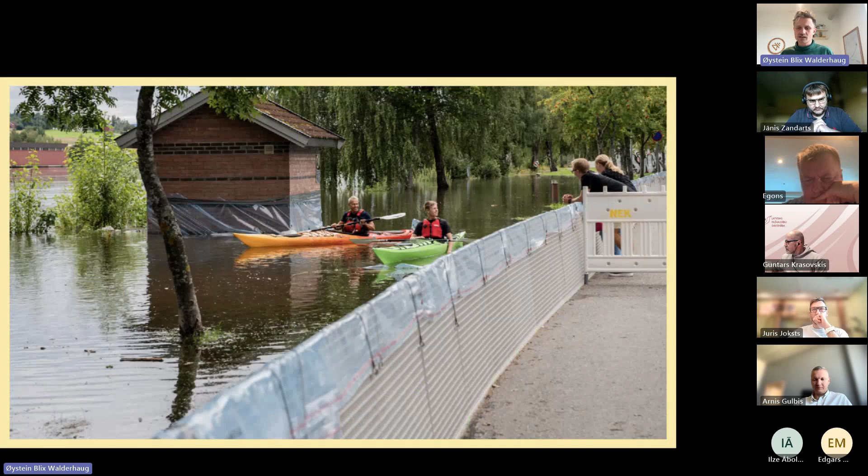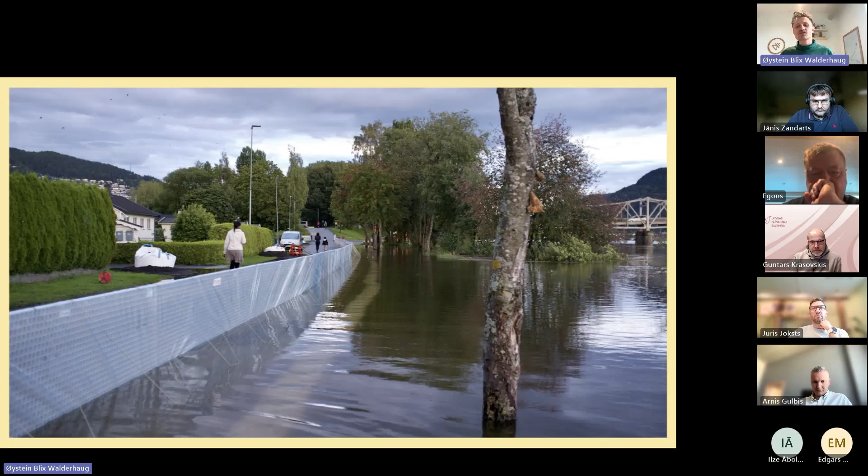Perfect. So to begin the presentation, we are very, very happy. We're very proud to be able to start all our presentations with pictures from real floods these last couple of years. There's been a lot of flooding recently, and we're very happy to say that our flood barriers have been used in many European countries. We started in Norway, and we've delivered to Norway, Denmark, Germany, France, and Spain, where currently Germany is our biggest market. But we're expanding to many other places since there is a lot of flooding all over Europe. I mean, all over the world, essentially.

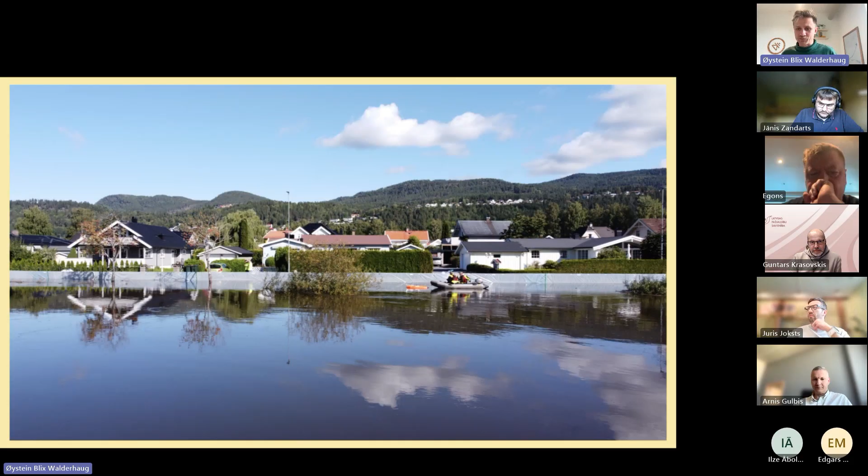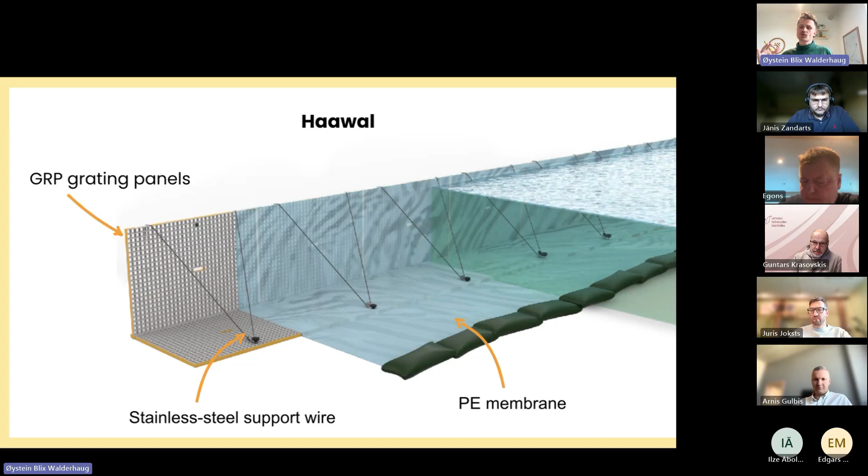So this is what our barriers do. It's a temporary barrier that stops water. But to say a little bit about how it does it, it is a temporary barrier that is not attached to the ground in any way. It is just put on the ground and it uses the weight of the water to stabilize the barrier. It's made of these glass fiber panels that are put together in an L shape, covered in a waterproof polyethylene membrane, supported by a wire to hold everything in place, and also one row of sandbags to make sure that the water goes on top of the barrier to push down and to stabilize the system.

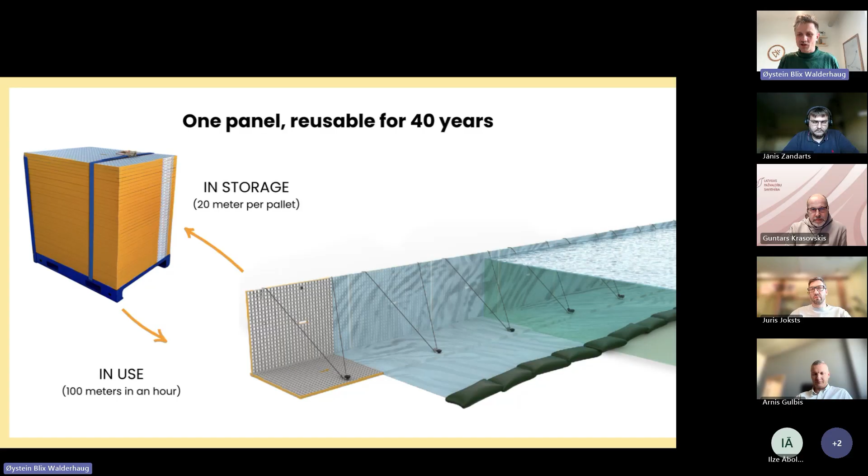And it's comprised of these panels, and all the panels are the same. For all the pictures, all the videos, everything we have, it's the same panel. One panel on the ground, one panel on the wall. There's no difference between those panels. So basically what we deliver is pallets with these plates on them, where you can then set up the barrier very quickly. From real life experience, it's 100 meters of flood barrier in about 1 hour. So quite fast to install. And in storage, it's 20 meters per pallet. So we have a video which shows how it's set up quickly. Hopefully the quality will be good enough.

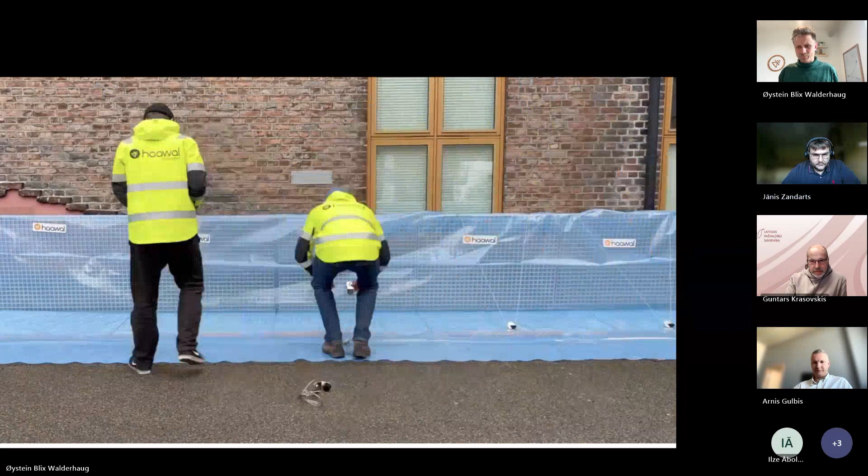How was the quality of the video? Pretty good, but without sound. Okay, yeah. I guess I can also just very quickly, if I stop sharing here, we can try something. Can you all see me?

Perfect. Yeah. So we have, let's see. So this is just a small module, just to kind of show you how it works. So the panels are stacked like this, and then they're connected by just putting this into the hole like that. And then it's supported. So it's quite a simple mechanism, but very, very strong and robust.

See if we can jump back into the presentation. There we go. Are we back in the presentation?

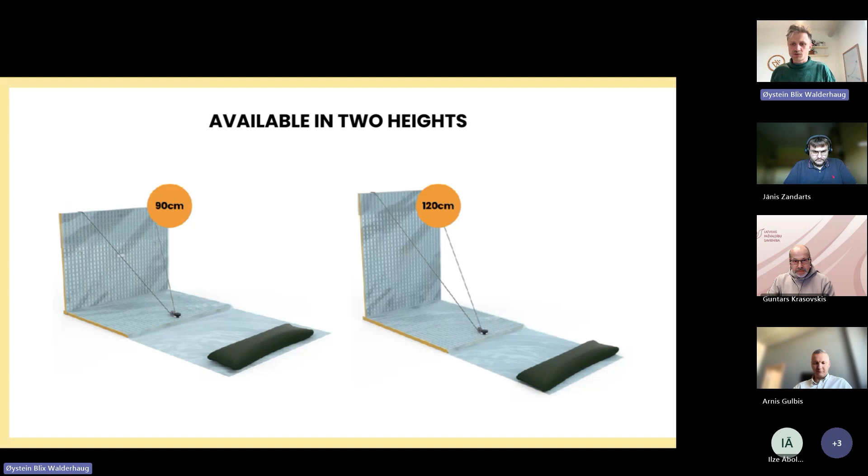So we have two heights, 90 centimeters and 120 centimeter tall barrier. And the prices are 348 euros per meter for everything for the 90 centimeter and 448 euros per meter for the 120 centimeter tall system.

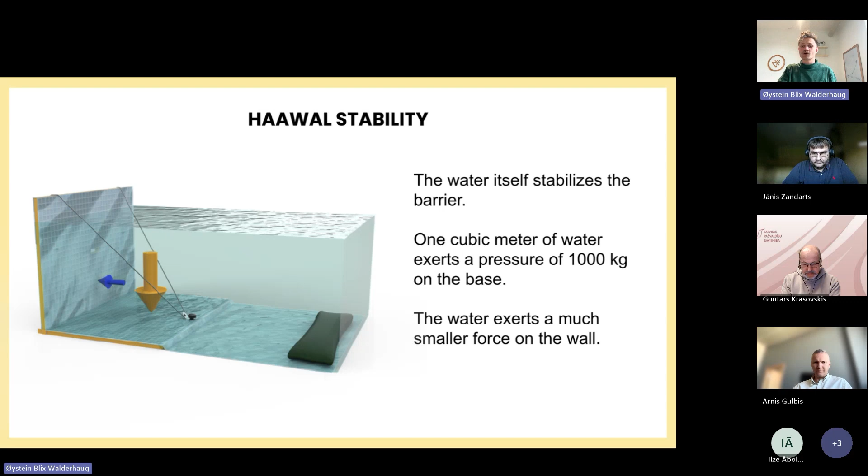So it's the weight of the water which stabilizes the system. So it's just the water pressure itself which makes a very, very stable barrier. So 1 cubic meter of water weighs 1,000 kilograms. So on each individual module, you have 1,000 kilograms stabilizing the barrier. And again, it's better to show than tell. So we have a little video which shows how it works with water, with energy, with movement.

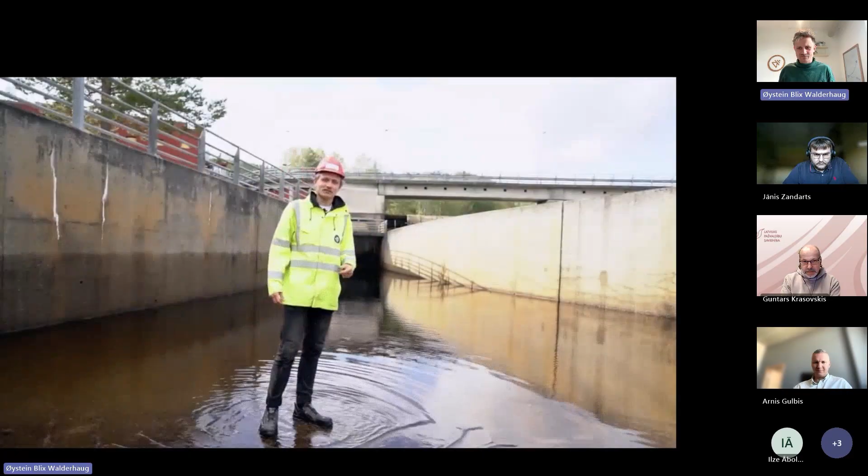Now we're at Glitre Energi's hydroelectric power plant at Pikerfoss. We're going to try to set up flood grading here and see if we can tip it.

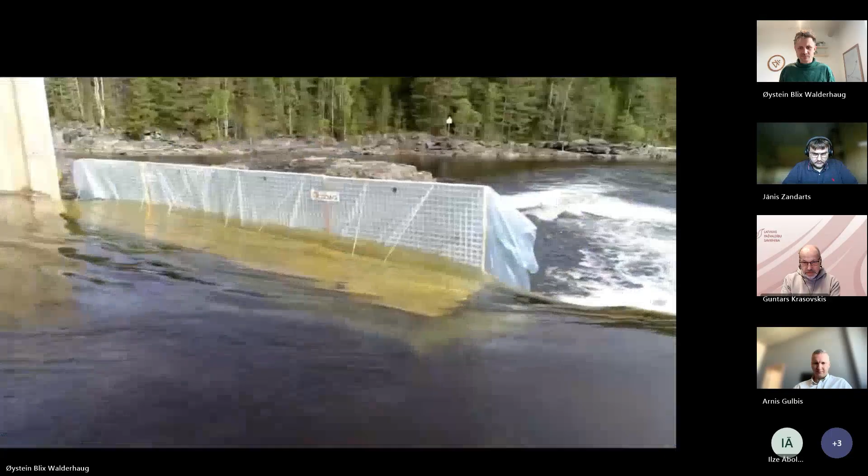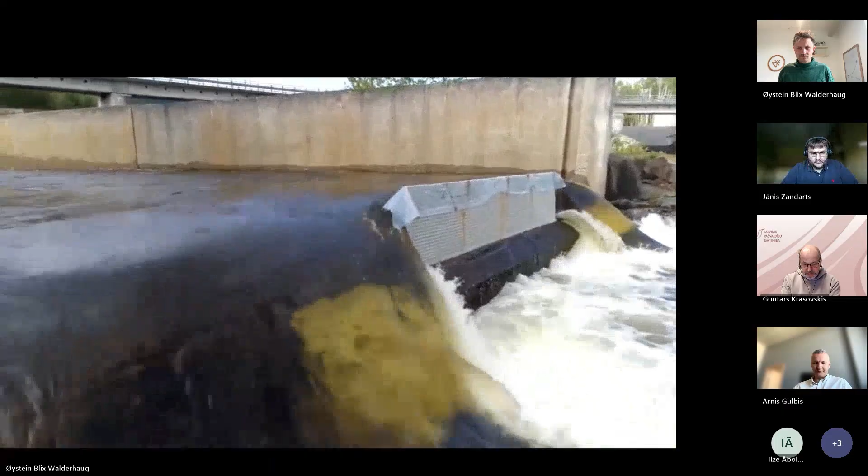We're now down with the flood grading modules we just saw being tested. It's a self-stabilizing system, so it's not anchored in any way. What this means is that now that the water's gone, we can just disassemble the system and it's ready for the next flood.

Sorry, Oystein, I will comment a little bit in Latvian.

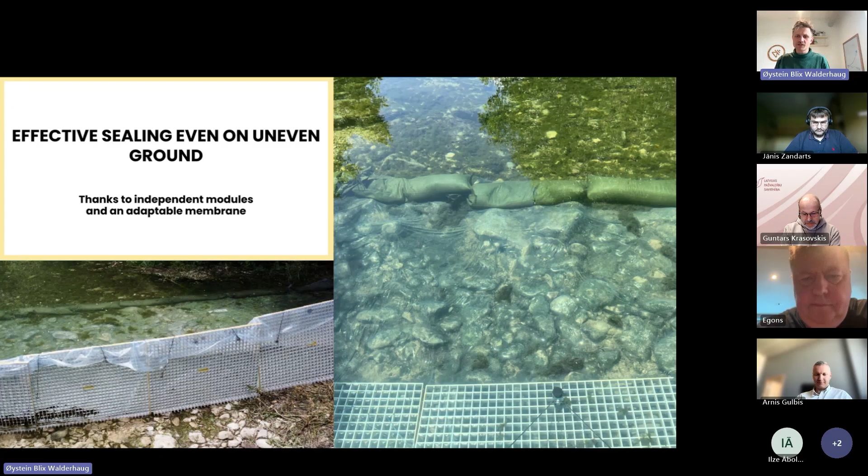And then it's the membrane together with a row of sandbags that attaches or adapts it to any unevenness. So here you can see how the water pressure pushes the plastic over the rocks, but you can also make these turns, these curves, inside turns, external curves, and also if the hill goes up or down, it's very, very flexible. And all this you set up with a single panel.

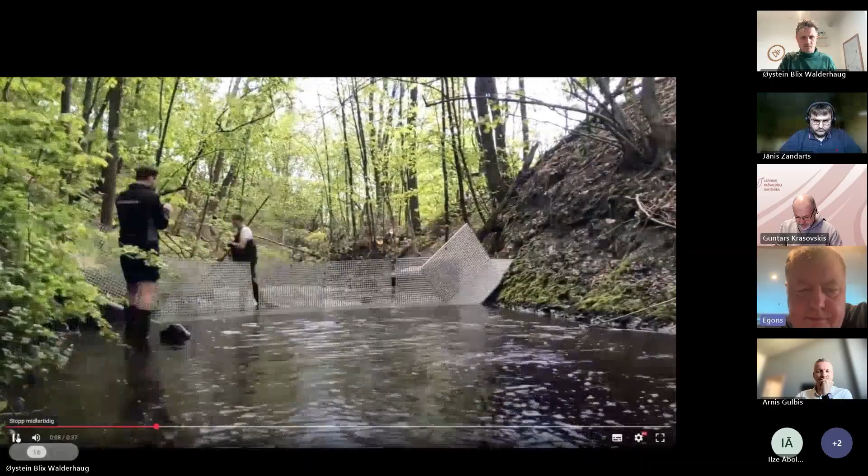So we have a last video in use, which is in a river, where the module to the far right is put 45 degrees against the rock. So you can see how it can adapt really to any terrain. So here on the right, it is just 45 degrees against the rock. And then it's the plastic, the membrane, which makes it waterproof.

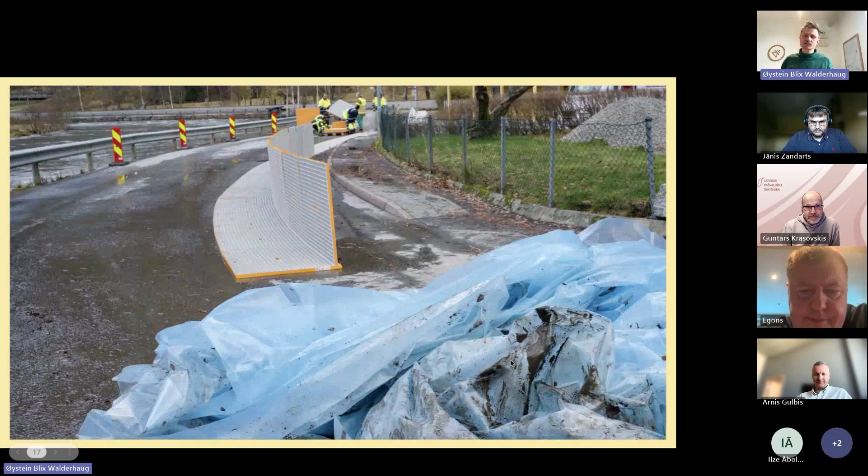And then a final point on the membrane is that it's single use. You change the plastic after every use. And here you can see one of the reasons for that. And that's that floodwater is usually very dirty. There's mud, there's a lot of things that the floodwater brings with it.

So this is a photo taken after a flood in 2021, where you can see the plastic is really dirty, but the system underneath is perfectly clean. And you can see the firefighters at the top are just putting it back on the pallets, ready for the next use. And then recharging or new membrane is around €4 per meter. So, 400 euros for 100 meters of protection.

So it's very inexpensive and easy-to-store components. There are no components on the system which need maintenance or which go bad over time. So the barriers themselves will last 40 years, being used again and again. So it's an extremely, extremely durable, reusable system.

So here are the use cases. It's flexible. You can put it along a river, for example. That's maybe the classic flood protection, either against rivers or coastlines. But you can also protect individual buildings. So the bottom left there is a municipality protecting a pump station, like a pump house, with the barriers.

But you can also protect buildings which are much bigger than that. So we, for example, have a couple of factories in Norway and in Germany who protect the whole factory by making a barrier around the whole thing. And also with speed, you can put it up as fast as you essentially train for. You can then also use it for flash flooding situations.

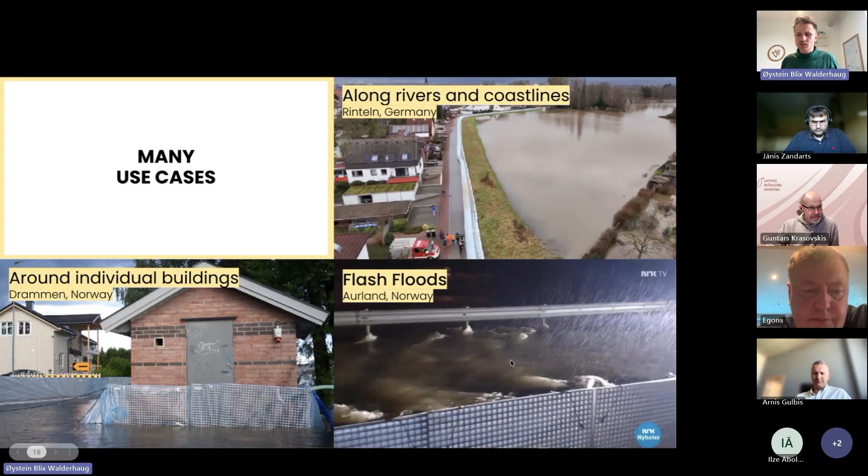But the same flexibility which makes it very useful for flood protection makes it also useful for other use cases. So, for example, it's used by quite a lot of firefighters for temporary water storage, primarily in forest fire situations, or in situations where you don't have access to water and you need to store it temporarily. So you can very quickly make a pool like this in any size you want. The one here is around 3 meters by 4 meters, but you can make it much bigger if you need to store even more water.

And for pollution in rivers, for example, you can dam up a river. If there's an oil spill, diesel or something in the river, you can dam up the river. And then you have to make a hole in the plastic membrane underneath the surface of the water to let clean water pass, but to keep the oil in the barrier so that you can pump it away.

And finally, the last use case at the bottom there is in Spain, where in Navarra, they wondered if they could use our barriers to stop fish, which you can, because now they put the barriers in the river between, I think, February and August every single year to create a temporary waterfall to stop an invasive species of fish from going up the river. They threaten a local population of mountain trout.

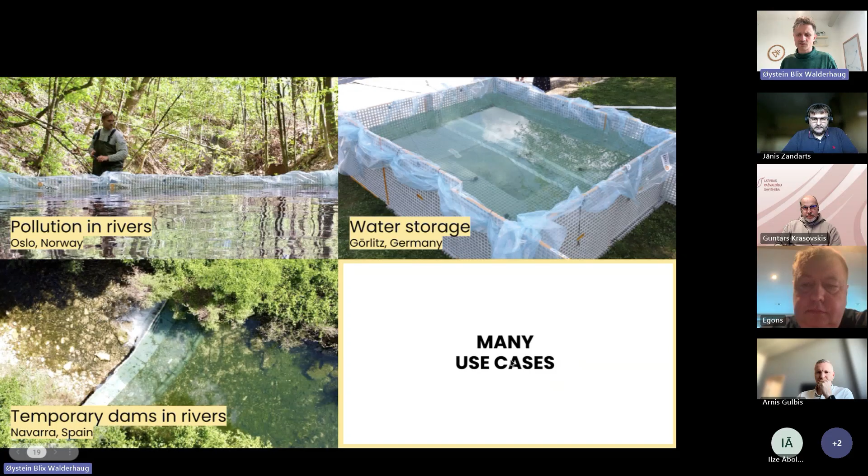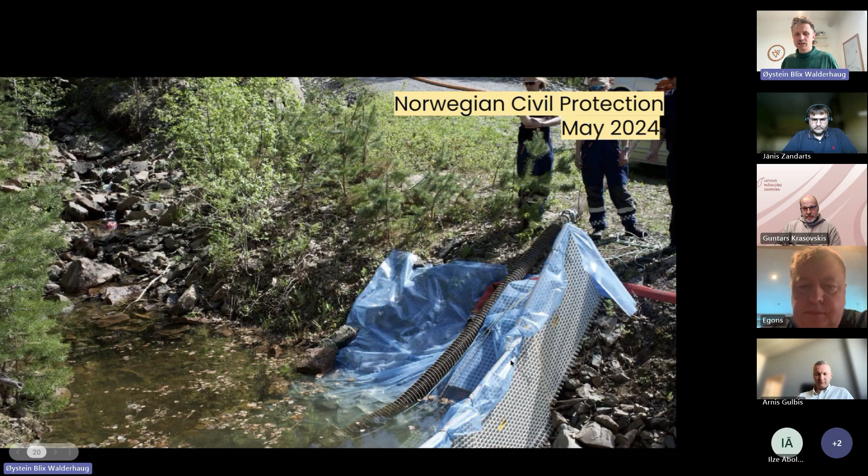And finally, again, for forest fires, this is the Norwegian Civil Protection doing an exercise where there's very little water in the forest during a forest fire. So you can see there's a tiny little stream, which they can dam up to get enough water to extinguish the fires in the forest.

But for flood protection, this is a flood in 2023 in Norway, where the municipality of Eidsvoll set up 330 meters in 3 hours. So from real-life use cases, we see that it's around 1 hour per 100 meters to set it up. And it worked very well. The flood was there for 4 or 5 days before it went away.

And there's no problem. There are, however, some things you have to be careful with when using a system like ours. The system itself is waterproof and works very well, but you have to be careful of the conditions of the ground it stands on. If the ground is permeable, water could pass underneath the system. So it goes into the ground, underneath the barrier and up out of the ground.

Also, there might be pipes or tubes going under the ground, which can let water pass underneath. So in situations like that, you might have to use pumps to deal with the water that passes underneath the system. So that works quite well.

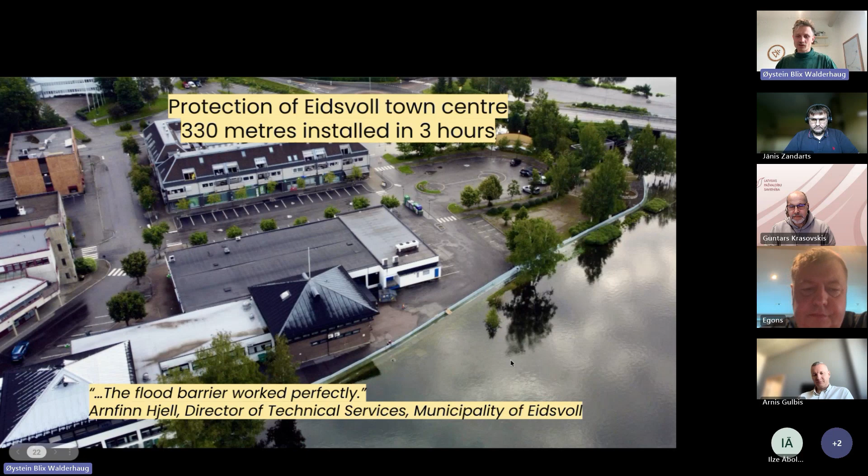Another thing that might have to be thought about with a system like this is that it becomes a tourist attraction, I guess you could say. So it attracts a lot of people. A lot of people come and look at the barrier, and that could cause troubles.

Here it wasn't a big problem, but in this flood in Drammen, there's just a small road behind the barrier, and many people came with their cars to look at the barrier, and it created a lot of traffic problems, so that they had to actually close the road. So dealing with people, private people, is something that it could be useful to have a plan for when it comes to using a barrier like this.

But this is Drammen, a flood where it actually was 2 floods after each other. They set it up, the flood came, the flood went away, but they left the barriers in place for another 2 weeks, which was good because after the first flood, there was so much water in the ground that flood number 2 came a second time. So this photo is actually a photo we took during flood number 2.

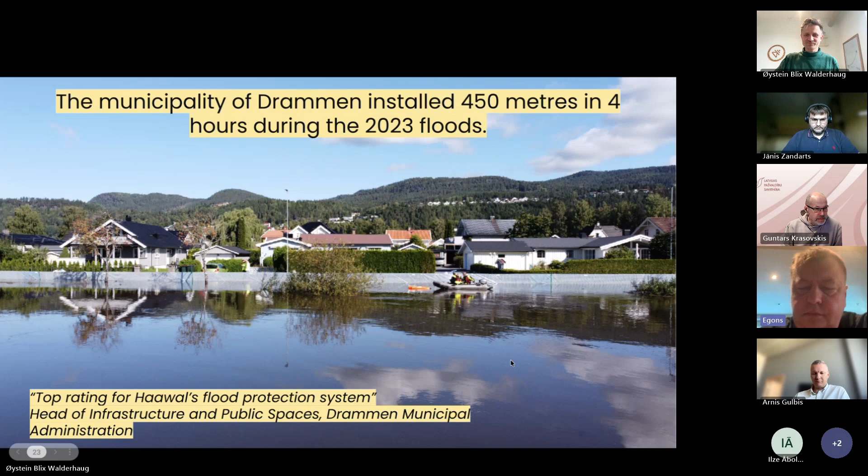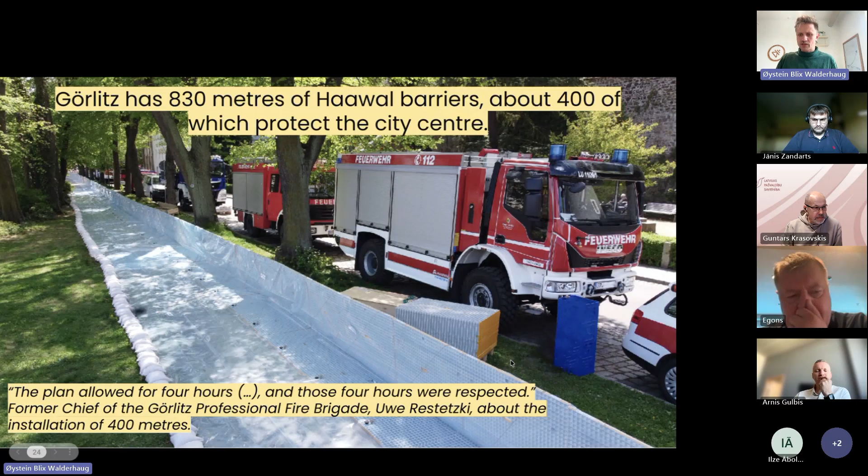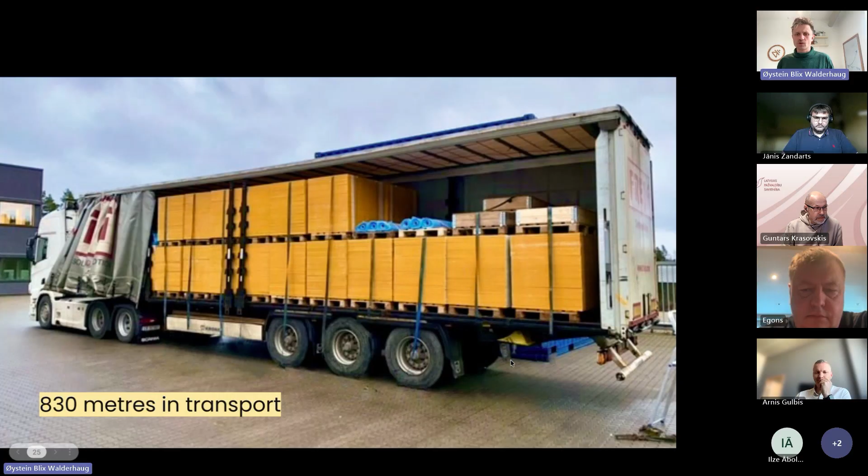This is in Görlitz in Germany. They have 830 meters of our barrier, which we delivered to them. And we delivered these 830 meters on 1 car. So here is how it looks in transport. You can fit quite a lot of protection on just one car. It's 20 meters per pallet.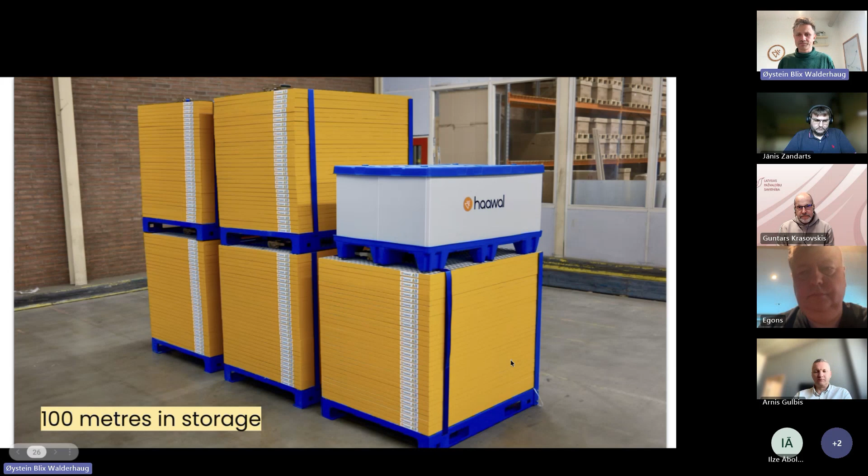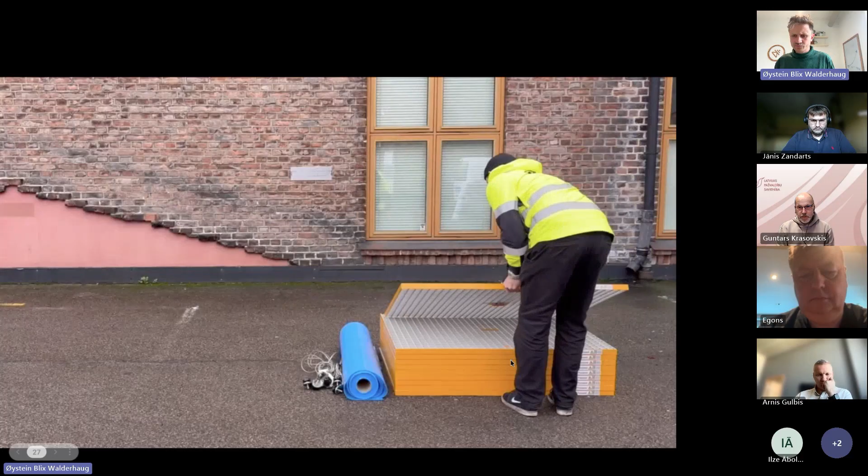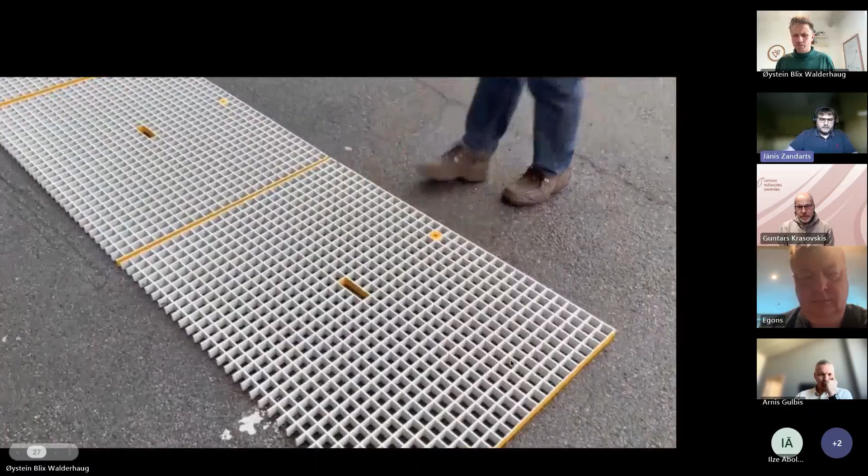And then we have, I guess the quality wasn't the best for the video. So maybe I can send this video afterwards if you want. I don't know, Jānis, are you able to see the video? Yeah, we see the video and it's pretty good, I think. But okay. We saw this video before at the start of the presentation. Yeah. In the start, we saw it very fast forward.

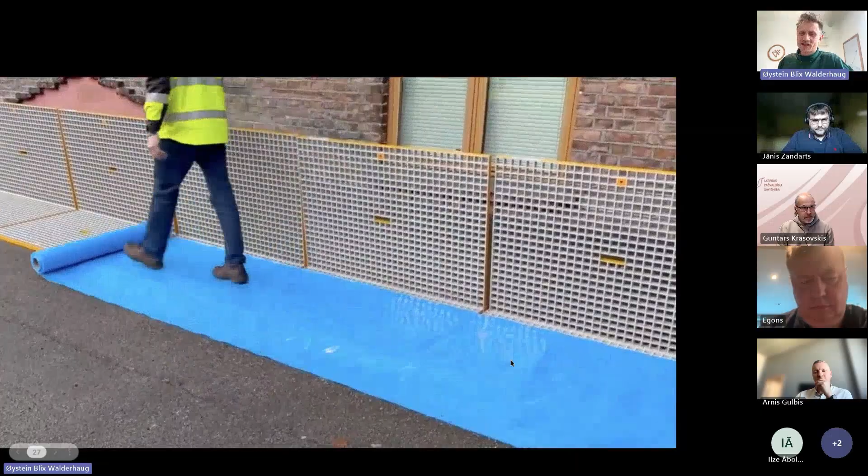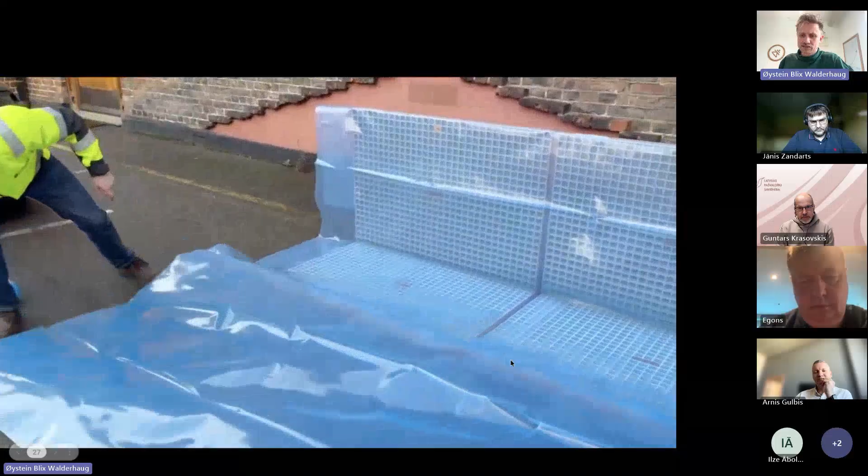Now it's just each step slower so that you can see the steps and how it's connected. So the two panels are put together very easily, and then the membrane is just folded out like this. And then the wire is attached with these connection points by piercing the membrane and then screwing it into the panels like that. And everything is with your hands. There's no need for machines. There's no need for tools. There's no need for equipment like that.

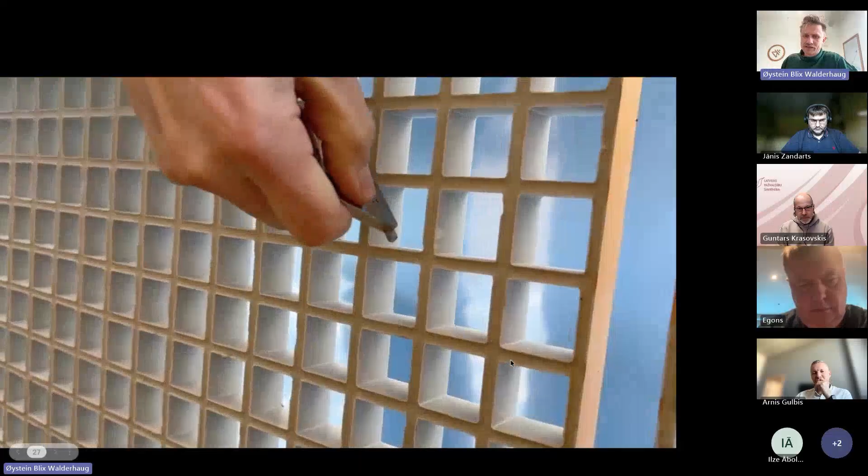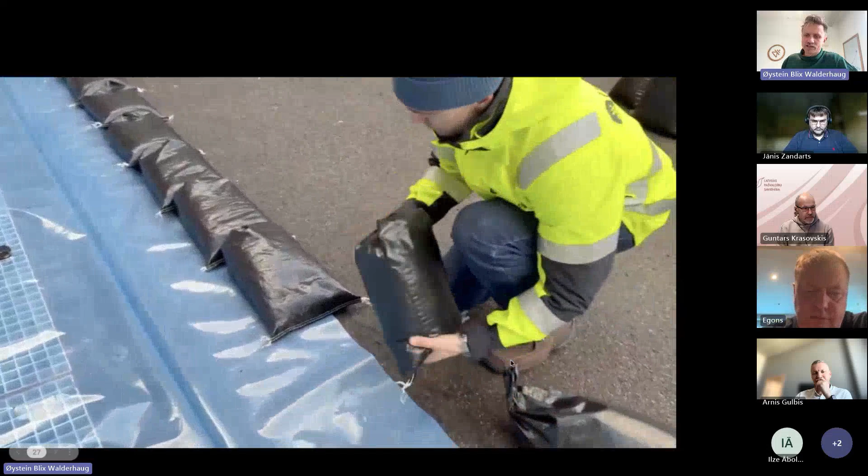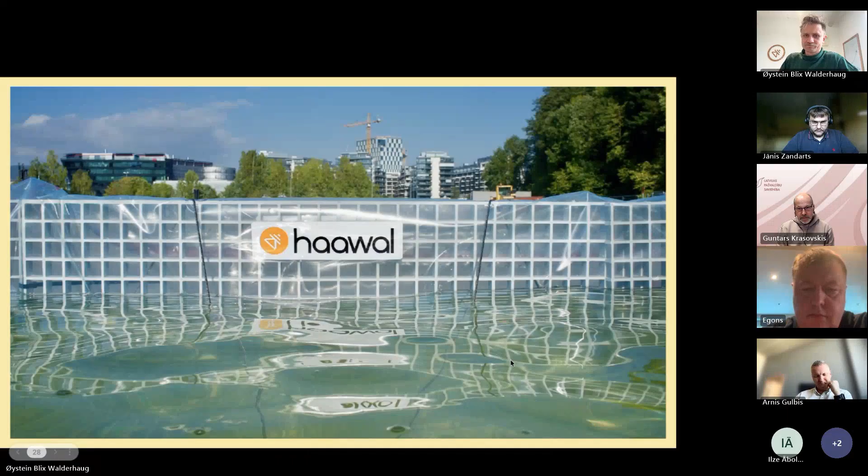And then in the back, it's just a hook that is turned to lock in place. So it's very simple mechanisms that are easy to implement. And then it's all locked off and kept in place. And then finally, it's just one row of sandbags, and then the system is in place. Perfect. So I don't know if there are any questions or if anything was unclear, and I'd be happy to answer any questions.